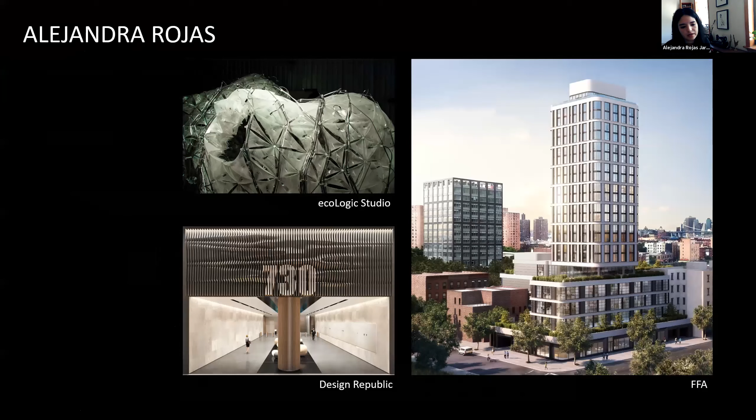Great, thank you. So as Willy mentioned, we're kind of a big hub that Matt will explain shortly. My name is Alejandra, and we will take you through this presentation.

Matt, do you have the screen set up? Yeah, you can see it? No, I still see the old screen. Give me one second. You can see it now? Yes, I can see it. Well, I can start talking. I'm still seeing your screen, but yeah, so I'm Matt.

I'm excited to be back. DesignMorphine started with the goal of sharing knowledge about the latest architectural technologies. We have grown to over 30 members around the world, and most of our members are architects. However, we also include visual artists, fashion designers, programmers, and fabricators, which allow us to put on workshops that intersect in all areas of design and technology.

We have put together over 60 workshops that take students from an initial concept all the way through to the final product. Our members develop a pipeline that balances technological sophistication and ease of user interface in order to best streamline the process, allowing participants with no previous experience to walk away with a finished 3D print, virtual reality model, or any other finished product. We take into consideration what would be the best software for the specific task and how to set up and export files between different software, along with the different modeling techniques best suited for the end result.

Next slide. When some of the tools aren't available, our members have created their own scripts and plugins, such as the surface modification tools like Pufferfish for Rhino and Grasshopper on the left, and Dynashape for Revit on the right. I would also like to invite you to check out OWL, which is a machine learning plugin for Grasshopper.

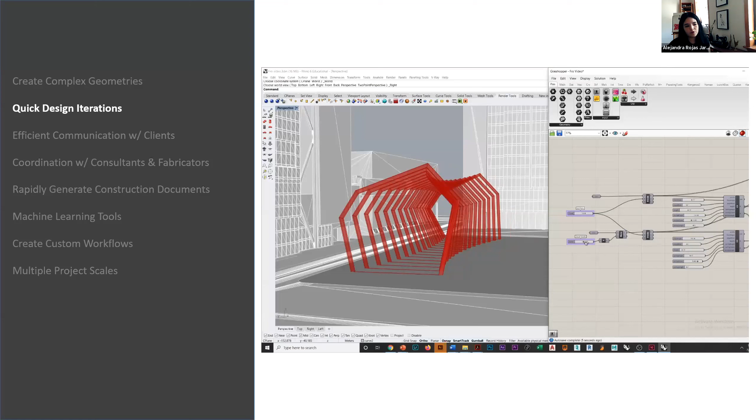Next slide. So how can parametric tools benefit us? They provide the ability to manipulate the shape of a model's geometry with given attributes. For example, they allow us to create very complex geometries and quickly visualize them by changing or manipulating some of the initial attributes or parameters. So we can start identifying the different design opportunities within our model and quickly start testing what it is that we want it to look like or to be.

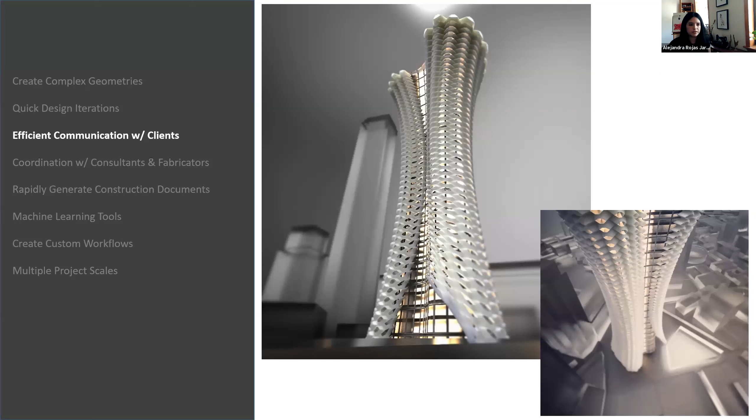It also allows us to very quickly generate a lot of graphic imagery for our presentations with our clients. And more so, once we have our model, like Matt was describing, we can then take our client inside our model, or even take it as far as the construction process.

So very quickly, I'm going to take you to a case study of the Morpheus Hotel by Zaha Hadid, where the architect, the structural engineer, and the facade designer were collaborating within one 3D model. They weren't modeling each single piece, but they had a 3D model with live attributes and live sets so that they could have a lot of feedback between the design intention, the structural analysis, and what could be fabricated. It was a constant loop of feedback.

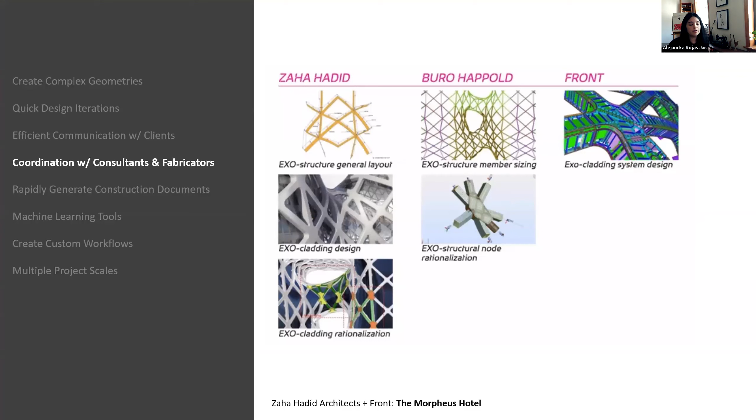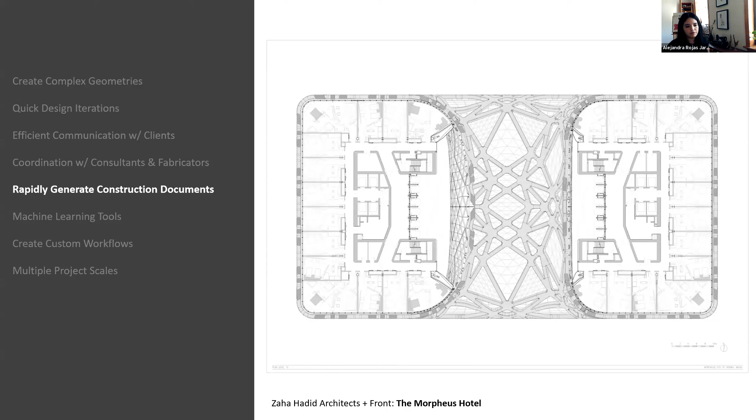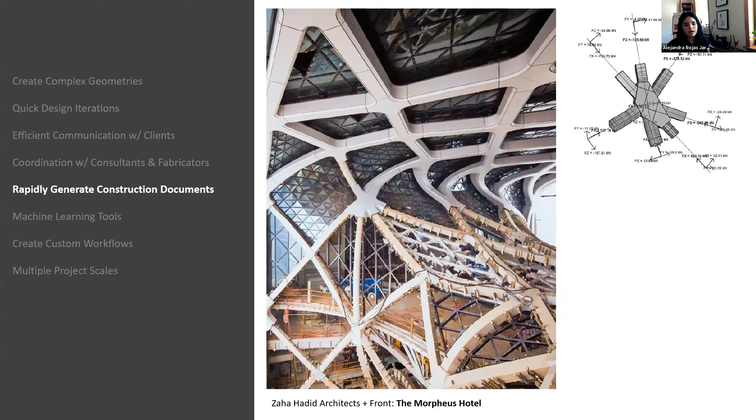A lot of the time invested setting up the initial model was then recuperated when generating the construction documents. So it's a bit of a trade-off, but in the end it pays off by being able to produce these drawings rather quickly and then going into construction, where you again have a 3D model to help you navigate the construction as well.

And then we can also talk about machine learning tools. There's now a lot of software, such as cove.tool, that allows us to analyze our building performance—telling you what the carbon emissions are, where you stand within the 2030 challenge, and things like that, which can help you make better informed decisions about how you want your building to be.

Understanding that these softwares can help us at the very beginning of the design process reduces a lot of the cost of design changes, because now we're integrating what kind of glass we want based on the specific project and location and where we want to be within our building performance. For instance, this case study by Duda Paine Architects analyzed around 3,000 buildings to determine which one was the best solution—the one that got closest to the performance they wanted.

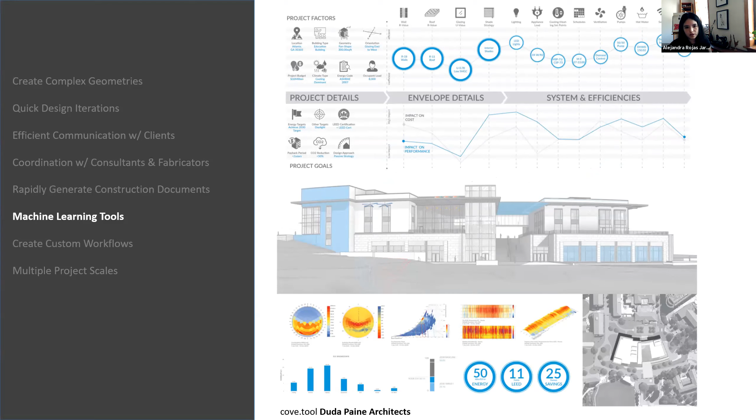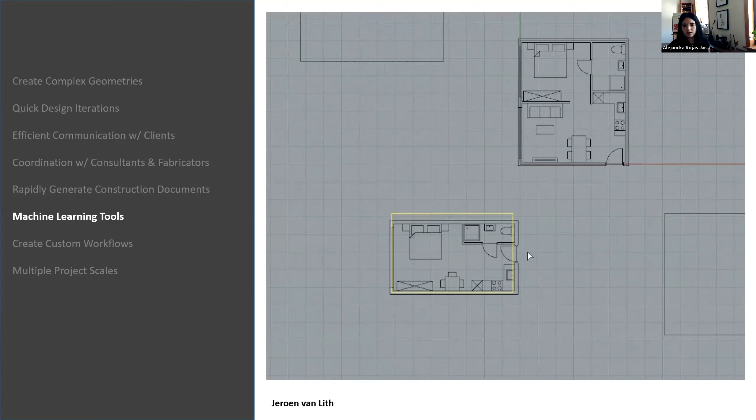This is a bit on the other side of understanding what machine learning can be. This is a project done by Jeroen van Lith—it's kind of data matching, understanding what the area is, the perimeter length and width, and then identifying what the best layout is that could fit within that perimeter.

The other good thing you can do with this software is create your own workflow. In this case, we were creating a workflow for form-finding techniques to get our geometry, then getting it structurally analyzed using Karamba 3D, and then optimized using Galapagos. All of these are accessible plugins for Rhino and Grasshopper.

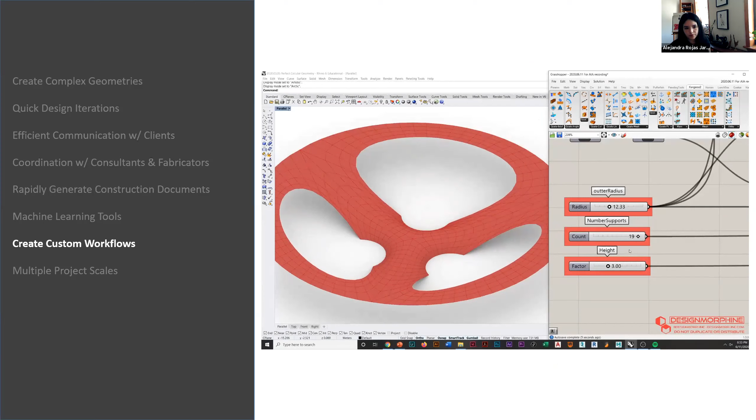Here we can quickly see how, once we have the geometry, we can start modifying those initial parameters we set up. But what's most exciting is when you can feed all those parameters into the optimization tool and say, okay, which is the best geometry that can give me a really efficient and cost-saving structural structure.

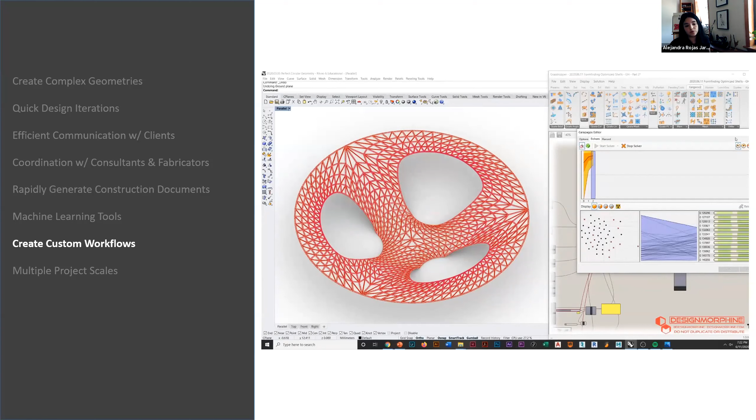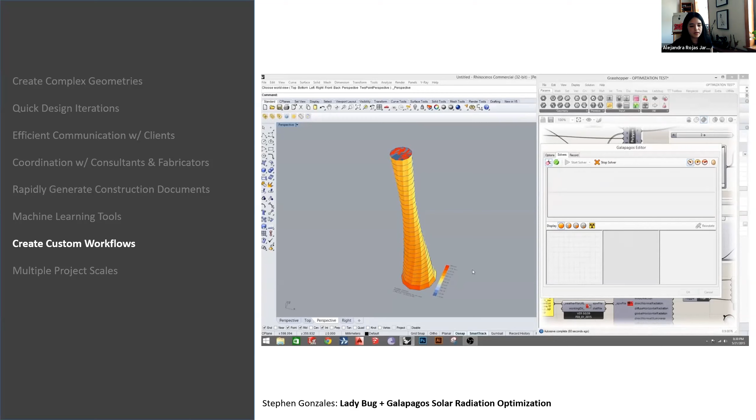So then again, we can even change this workflow and start introducing solar radiation by using another plugin, Ladybug. The good thing too is that we can work across multiple project scales, and we can start inputting a lot of data at different scales.

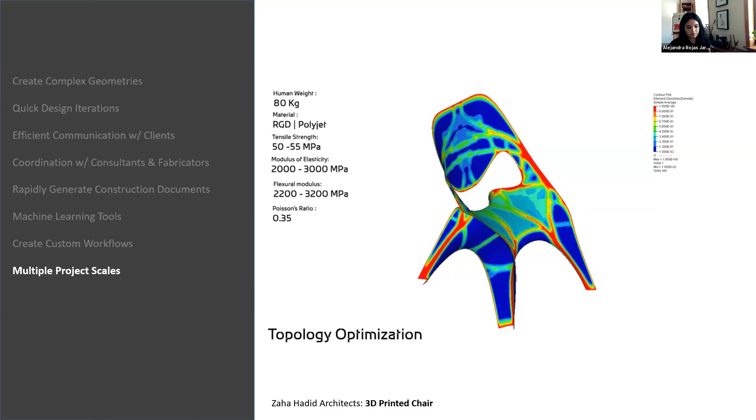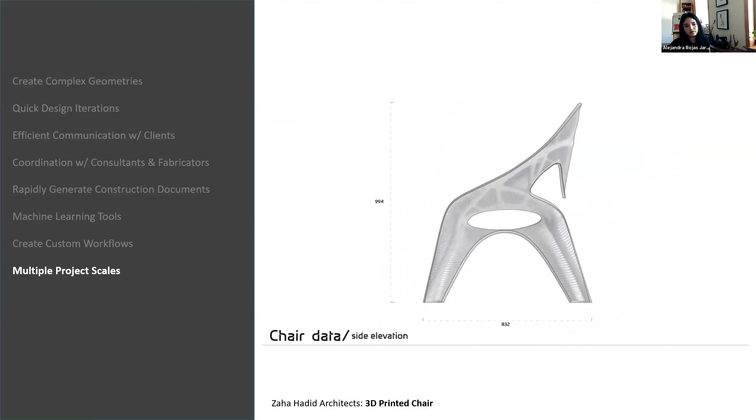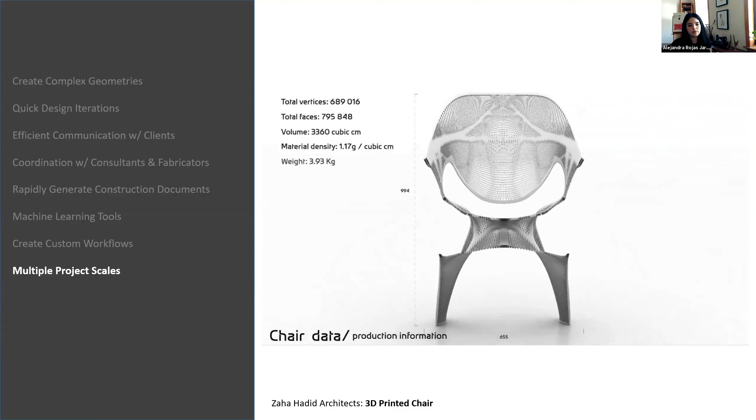For instance, in this project by Zaha Hadid, the 3D printed chair from 2014, you can start inputting a human's weight. Once you have this 3D model, the great thing is you have all this data and information you can easily extract from it—not only the 3D model, but also the material density, the length of printing time for each one, so you can make your decision.

And then we're also talking about wearable architecture, where you can do jewelry design and whatnot.

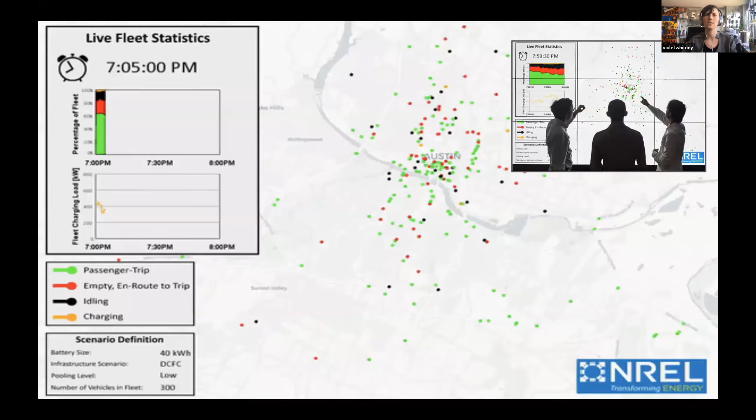This leads to understanding how neighbors might share resources within certain walk distances, how autonomous vehicle fleet size impacts congestion, how the UX on an app impacts wait times, how a pandemic can spread based on policy, how walk times are impacted by the makeup of a street, or what it might look like if we designed Google Maps routing for an individual's preference to walk past nature, past streets, or past areas with more activity.

In the future, we're going to need to think a lot more about design in terms of these ephemeral aspects—the behavior and the outcomes. The ability to measure these both through simulation and post-occupancy studies allows us to align much more on the incentives of what that design does, rather than just the physical presence of that thing.

The second thing I wanted to talk about was democratization. What I mean by democratization is accessible programming—I don't need to know how to code to do the things that programming does. Something like If This Then That, one of these websites that allows you to string together Internet of Things applications. I can go to this website and say, if the temperature increases in this room, send me an email.

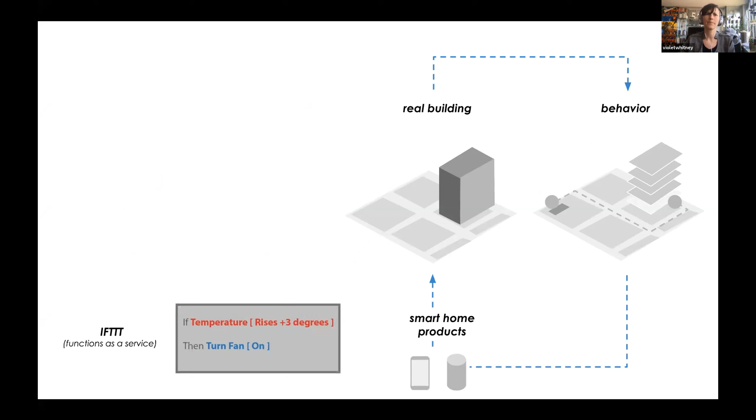Where code used to be incredibly monolithic, you had to work at Autodesk to change the software, or work at Amazon to write a whole smart home application. Microservices take what's usually a large monolithic application and pull out that little bit of executable code.

So in our class, students design simple code recipes: if something happens, do this action. This was the very early prototyping thing we did with just cards to get some ideas.

Here are some examples, and we had a lot of fun just naming these. If you're mentioned on Instagram, water my plant—that's the ego grower. If we measure no women in the meeting, send an alert email.

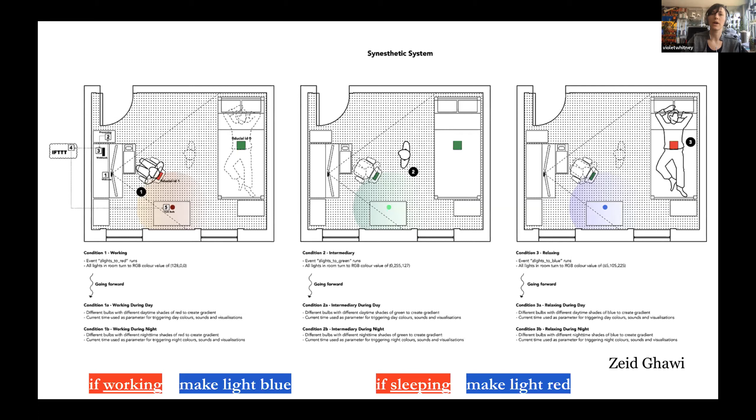This student made a device that would change the light based on what was happening in the room. The idea was that if I go to bed, the color of my environment will change. It was always really funny trying to prototype with these things because they were very hacky prototypes—half the time you'll get the exact opposite behavior than you actually want.

So the technology is definitely not quite there yet to be fully accessible.

This student was really interested in buildings having a personality, and so this building is trying to tell you to open a window when the temperature outside looks nice.

This student was interested in changing the mood lighting of an environment based on the actual moods of people in the room. So it would respond not by who switches the light on, but how a group of people are actually feeling.

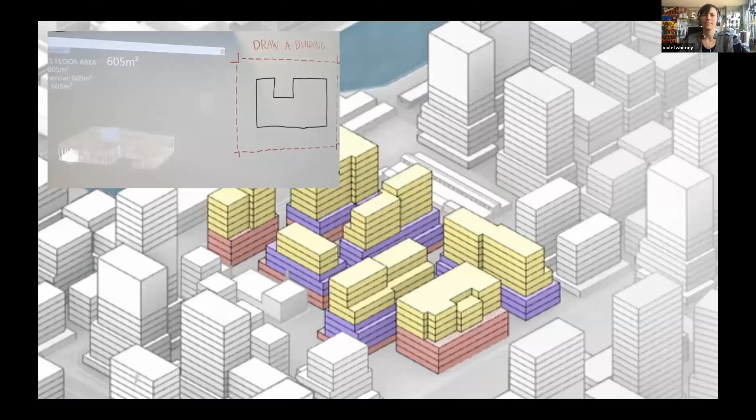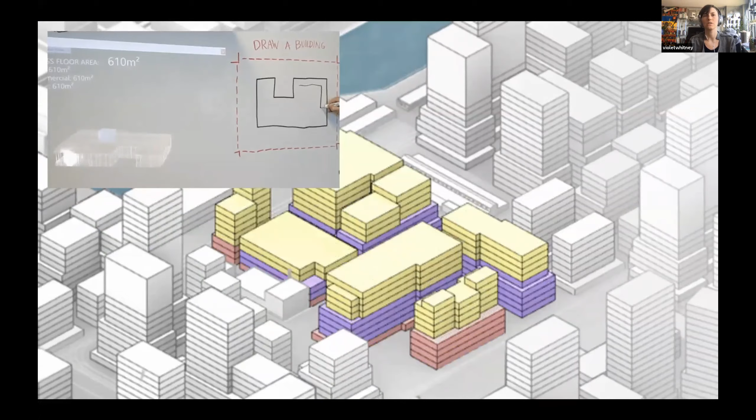What's interesting about a lot of these experiments is how much they allow non-programming experts to control the environment. You can imagine a future where any person can participate in the design of indoor environments, but it's not just designing our interiors—democratization also allows people to participate in master planning, building design, or other types of design.

So again, the big things are democratization and measurement. Measurement will change incentives, allowing us to ultimately charge for outcomes rather than building as an object. And democratization is going to allow us to design with people rather than for people.

If you're interested in any of the stuff I shared today, here's a couple links to the courses I covered, or you can reach out directly through the Architecties group, which is a group of architects, non-architects, and people interested in spatial tech, by joining this Slack group.

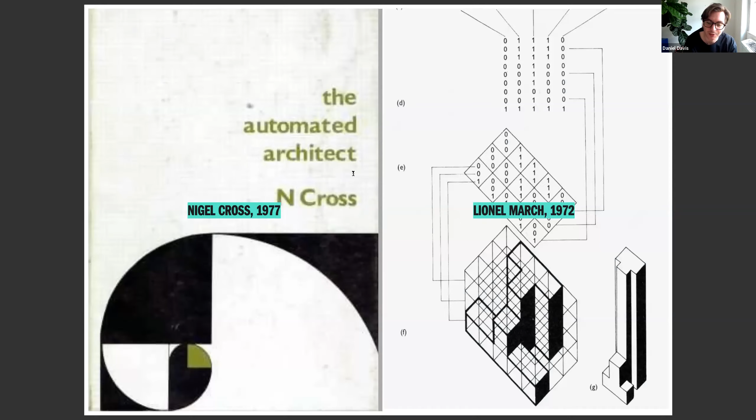I want to start by saying that a lot of these things we're talking about, particularly around automation and data, aren't necessarily new to our field. Pretty much since the invention of the computer, architects have been trying to find ways to change and automate the profession as a result of it. A lot of this early work didn't work for a whole variety of reasons, but as you've seen in some of the presentations so far...

In the last couple of years, there have been some really big breakthroughs in the way architecture is practiced and buildings are produced. Some of this ties in really nicely to what Violet was talking about. From my point of view, there are three major changes: the rise and accessibility of data, the systematization of the construction process, and this new relationship we have to technology these days. I'll go through these quickly and then talk about the anxieties they induce.

So the first is data, and Violet talked a little bit about this in relation to measurement.

I just want to reiterate that for most architects, the idea of what actually happens behind closed doors in the projects they produce is something of a mystery. When we're talking about performance and design outcomes, not knowing what happens in a building is a real impediment to the industry creating environments that work for people.

You're seeing in a whole bunch of different industries this absolute explosion in the amount of data being produced, and the building industry is no exception. A lot of this is happening on the fringes of mainstream practice. Companies like Disney use a magic band that tracks where people are in their parks and gives feedback on how people experience those spaces. Amazon's physical stores use cameras to track where people are and get data on how people explore and see products in the physical world.

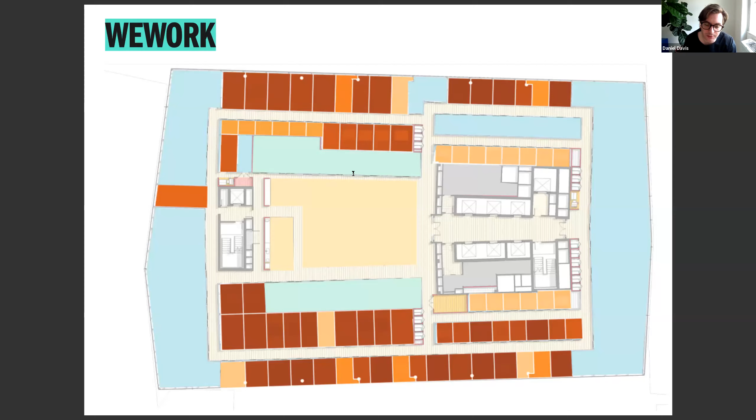You have companies like WeWork using data to make predictions about which spaces are more likely to be sold. At HASSELL, we're starting to tap into this a little bit. In the research group, our major focus at the moment is trying to find ways to get regular feedback from our projects and to collect data more regularly on them.

The second major change you're seeing in the industry at the moment is systematization. One of the most poignant examples — these numbers are a little out of date now but still pretty representative — when you look at the architectural services industry in the United States, it brings in about $45 billion. That's architecture firms, landscapes, interiors, the fees they're bringing in. The amount of money being invested just in startups in this space is around $10 billion a year, a huge amount in comparison to the services architects are pulling in.

Of course, these property tech firms aren't going after architects, they're going after the much larger opportunity, the $10 trillion construction industry. So we're seeing a lot of people investing a lot of money at the moment finding new ways to construct architecture, whether or not that involves an architect.

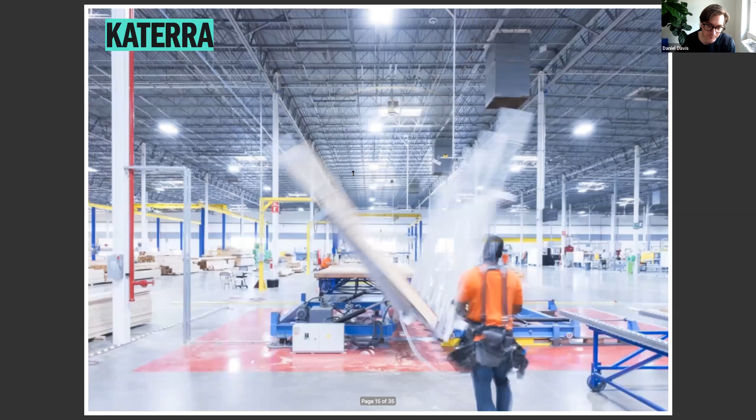Katerra is a really prominent example — I'm sure you've all heard of it — trying to vertically integrate basically the construction process, building a whole bunch of factories and their own software.

At HASSELL, we're thinking about this a bit as well — this is a project we did for the Mars Habitat competition. There's a really good TED talk by the person who led this, Xavier, if you want to watch it. For us, the Mars competition wasn't really about wanting to build architecture on Mars — it was more an opportunity to think about what it's like to construct an environment where resources are really constrained. It costs thousands of dollars to send a pound of material to Mars, so in that kind of environment, what are the systems for constructing and building architecture? These are lessons we can take from this extreme, abstract situation and bring back to more real projects we deal with day to day.

The third major change you're seeing in the industry at the moment is this new relationship to technology. This quote from Negroponte sums it up beautifully — it's a really old quote where he talks about how technology and computers back in the 1970s, the design process itself was broken, and trying to replicate that broken design process and automate it on a computer is just going to create more bad architecture, because the process itself is the thing that needs to change.

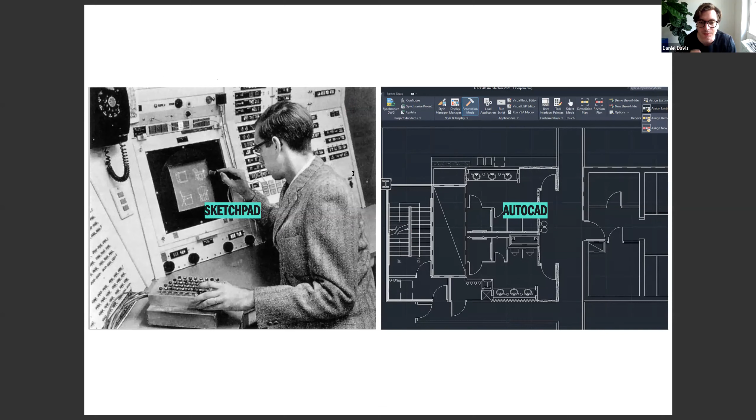I think a lot of the early experimentations with computation and digitization of architecture relied on taking a skeuomorphic approach — taking the drawing board and turning it into something digital. There are a whole bunch of different companies at the moment experimenting with new ways of doing this. TestFit is one I think is really cool — they're generating parametric buildings where, if you're a developer, you can change a whole bunch of site parameters and they work out what's most efficient for a site.

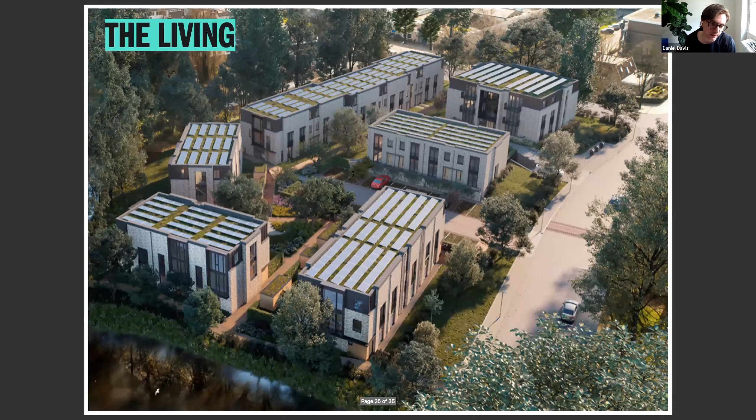The Living's another example of an architecture firm that's been able to create new tools that, rather than drawing the building, generate various aspects of them.

I think all of this brings up a whole bunch of anxiety for the industry, and in many ways a lot of this is really human and understandable. If your professional identity is tied up in producing architecture, and these systems are coming along and maybe not replacing your job but replicating some aspects of it, it brings up this really human question of what is my worth in that system, and what is my identity in that kind of world?

If we're talking about these kinds of systems that are pushing towards creating better places, I think there's a real tension that exists. What if we don't agree on what the definition of better is? A lot of the pushback you see against big tech companies entering into this space is that their definition of what a good built environment is probably isn't the same as what us as architects and the community as a whole agree upon as being a better outcome.

Particularly relevant to the current situation we're living in, a lot of these systems we're talking about are tools that are optimizing for the masses, or designing for the mean. For people that aren't necessarily in that cohort of the masses, or who are on the edge of what we'd consider normal, this creates a lot of problems, because they're left out of these systems, which aren't considering or designing for them — they're designing for what is normal.